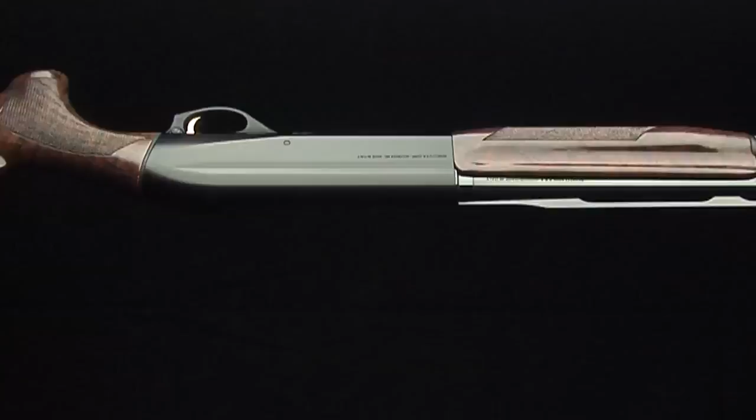Benelli Armi was established in Urbino, central Italy in 1967 and, since its inception, has revolutionized the concept of shotguns, becoming the world's top manufacturer of semi-automatics. Yet not many know that Benelli, as a firearms manufacturer, began as a side project when the company was known only for their production of motorcycles.

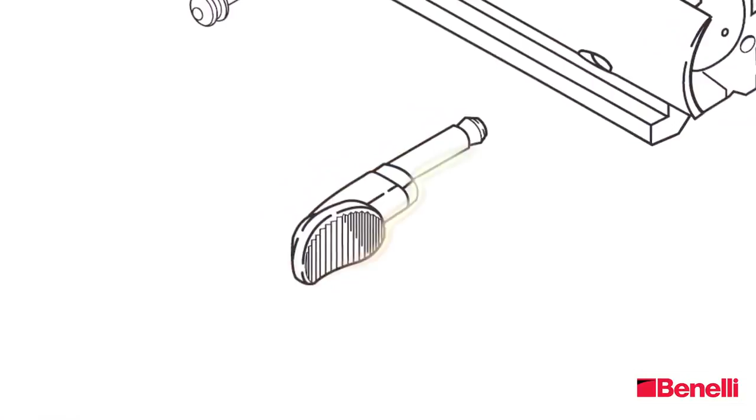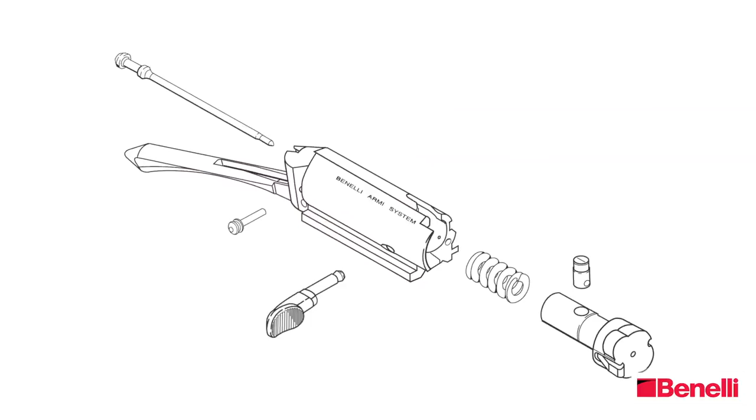The Benelli brothers, both keen hunters, were approached by a young inventor, Bruno Civolani, with a new and unique type of semi-automatic shotgun mechanism, the inertial system. The key features of this system were its reliability, safety, simplicity, high performance, minimum maintenance, and high firing rates, up to 5 rounds in less than 1 second. To the present day, the inertial system is still recognized as the most efficient of all semi-automatic shotgun mechanisms.

Today, Benelli is a highly technological company, where innovation is priority and every step is taken towards developing inimitable products. Year after year, Benelli's firearms have become milestones in the annals of sporting history and are considered the ultimate must-haves by most hunters. The SL80, 121, Montefeltro, Super Black Eagle, M4, Raffaello Creo, M2, Beccaccia, Comfort, Raffaella 28, Creo Comfort, Bimillionaire, the Argo E semi-automatic rifle, and now the Vinci, the head of a whole new family.

How does a Benelli firearm come to be? It all starts with the customer. Benelli's marketing department analyzes the latest trends, needs and wishes, and passes on a set of design requirements to the R&D department, where expert engineers develop the high-performance products that today's hunters demand. Every phase, from concept to distribution, is supervised with the utmost care and precision, with the greatest emphasis on design.

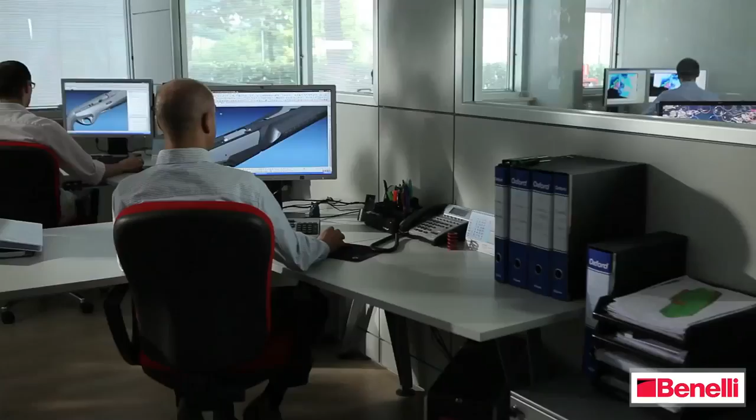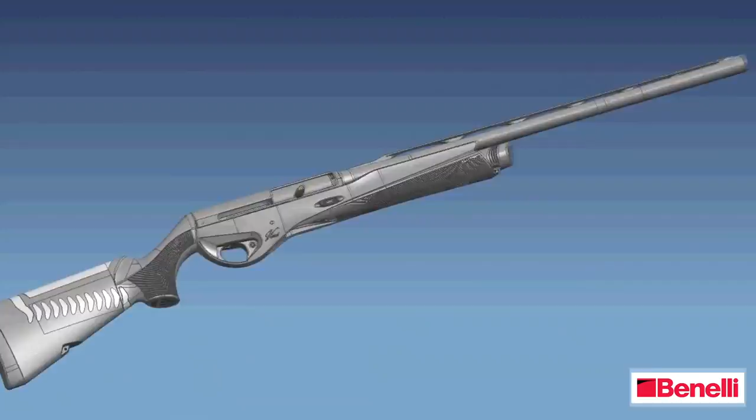Benelli's engineers use sophisticated CAD and CAE software to design their new shotguns and to simulate their functioning. Long gone are the days when gun makers had to test their new ideas by trial and error before achieving a satisfactory result. Today, every little detail, down to the smallest component, is verified and optimized virtually well before it appears in the real world.

At Benelli, all possibility of human error has been eliminated from the design process, because what happens on the computer screen is exactly what will happen in the real world. Simulation and reality match perfectly.

Over the years, Benelli's R&D department has developed 19 international patents, including the Comfortech system, unrivaled in reducing recoil and vibration, cryogenically treated barrels for improved ballistic performance, and the Vinci inertia system that achieves maximum stability and performance when firing. Special materials and sophisticated coating treatments make Benelli products exclusive and unrivaled.

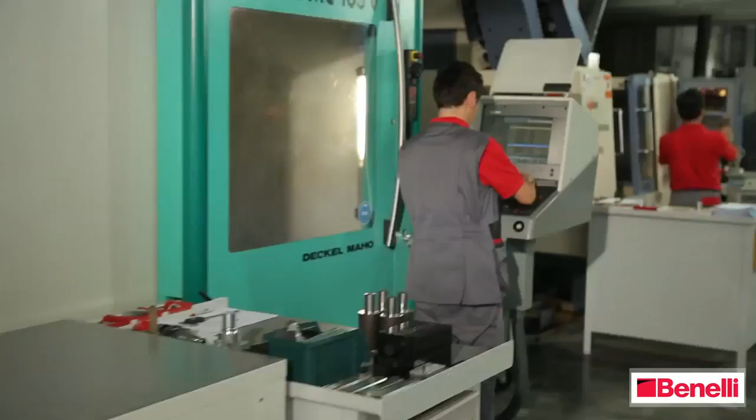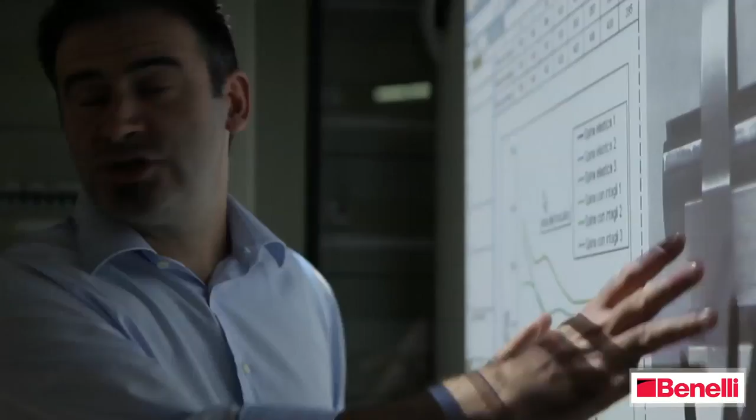The testing department is where new products take shape, where the virtual becomes real, where ideas are transformed into prototypes. Futuristic test equipment and specialist technical personnel assemble and test the products, destined to become Benelli's next best sellers.

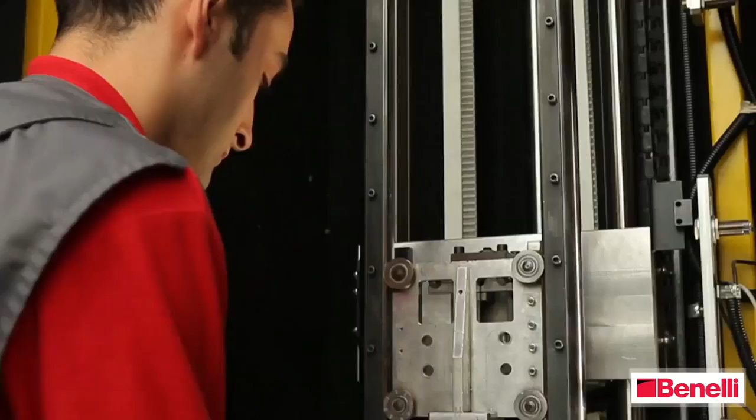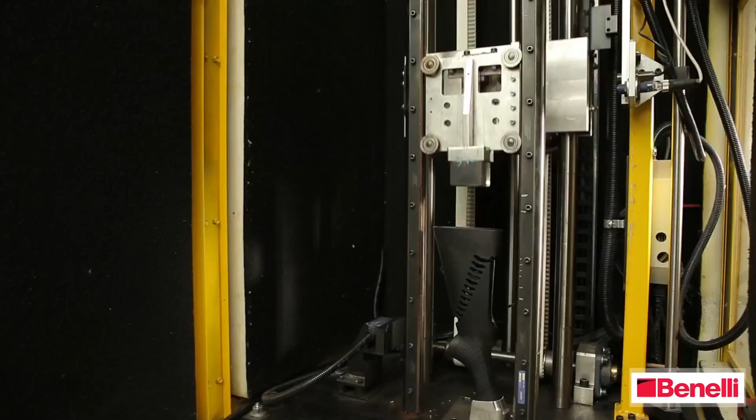Every single component is tested under the most extreme conditions, subjected to the toughest trials, and stressed relentlessly for hours on end, way beyond what any weapon would normally undergo in the real world. Benelli wants to be absolutely certain of the safety and reliability of its products.

All Benelli prototypes must prove themselves exceptionally safe and reliable, and must perform consistently. Data obtained from sensors and sophisticated slow-motion video cameras are analysed in detail to ensure that the weapon being tested not only behaves perfectly, but delivers the ultimate in performance as well.

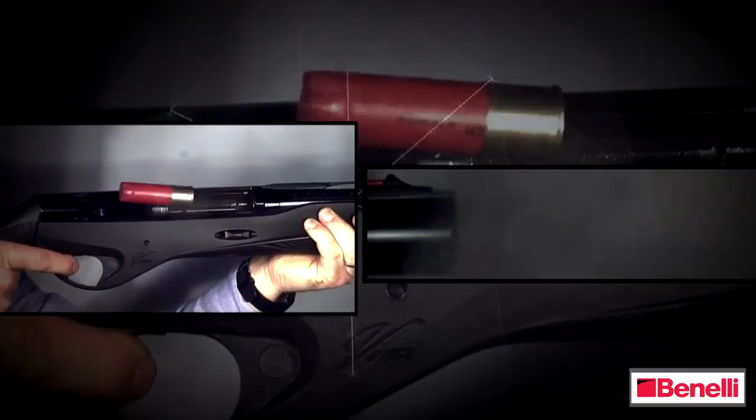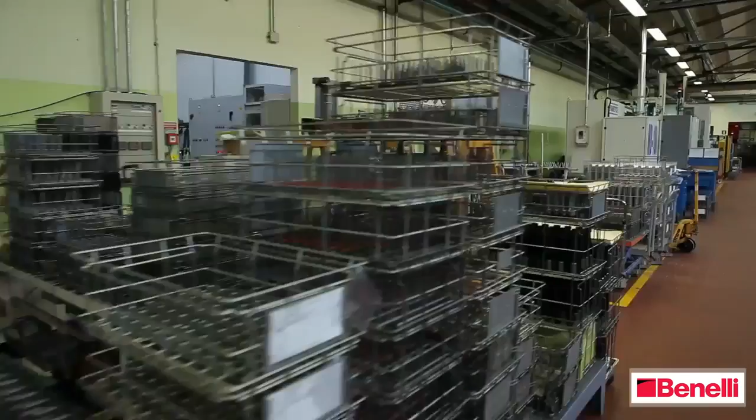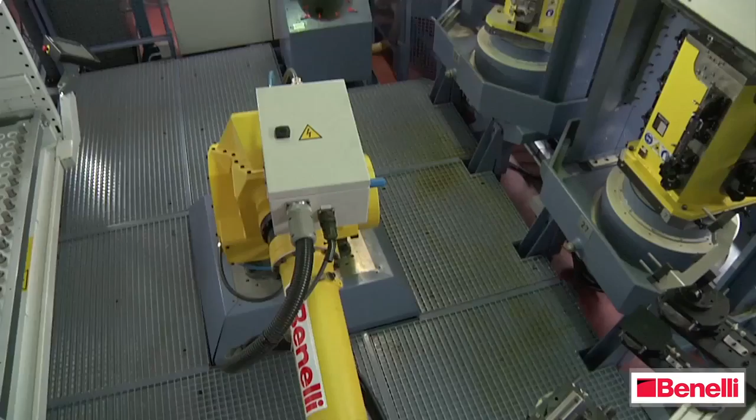Only when all tests have been passed is a shotgun declared fit for cloning. And cloning is just the right term, because Benelli's advanced automation produces exact duplicates of every individual component. This means that the end customer purchases an exact copy of the shotgun that has been tested in Benelli's testing department. Tireless and infallible robots repeat every operation with absolute precision, and the entire production line is continually monitored by a control system to ensure its perfect functioning.

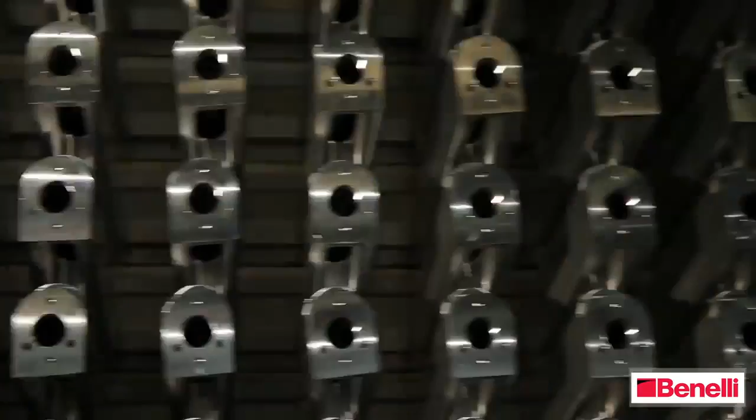Piece after piece, all perfect and identical, no exceptions. Every component must match flawlessly the original design.

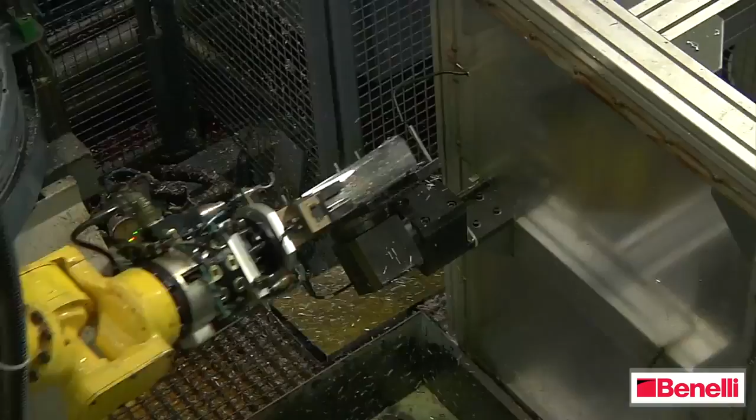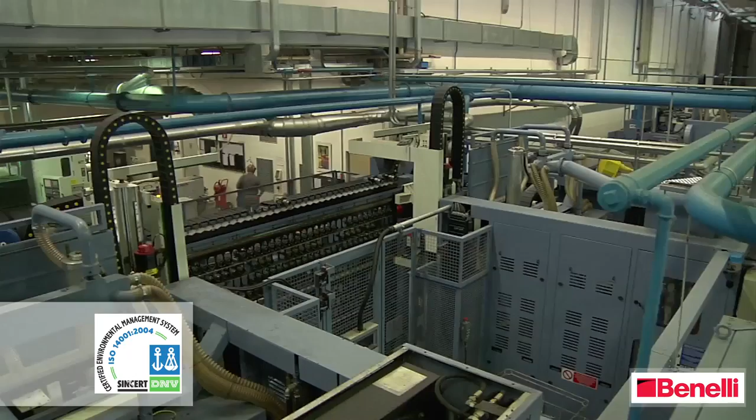The Benelli factory is unique in the world for its automation as well as the attention towards environmental, health and safety issues. Advanced ventilation, climate control and cleaning systems safeguard the workforce, while stringent anti-pollution measures, recycling processes and toxic waste disposal systems ensure maximum respect for the environment. The Benelli factory was the first and is still the only firearms factory in the world to have been awarded ISO 14001 certification.

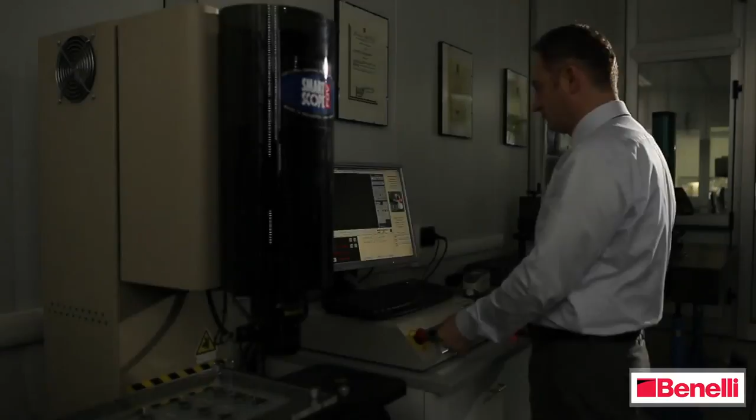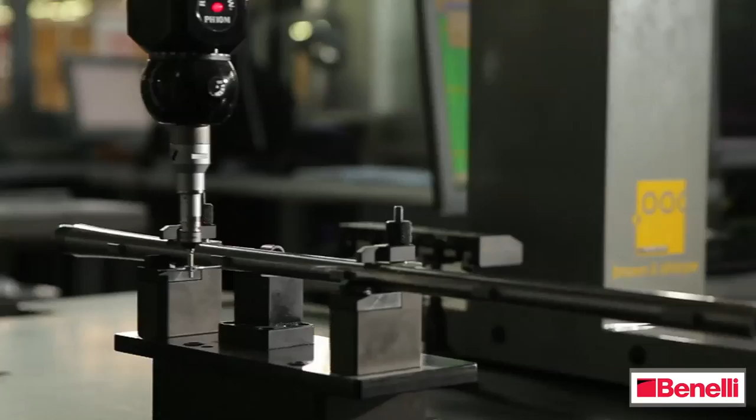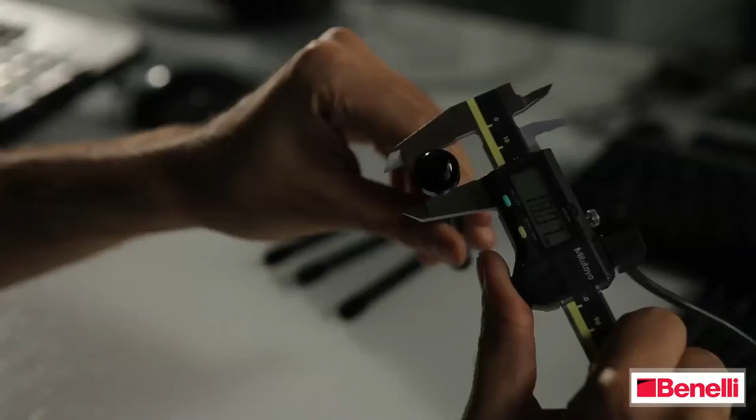So far, we've seen that prototypes are only released if they are perfect, and that robotic systems are used to make perfect copies. But even this is not enough for Benelli. Random samples from the production line are regularly tested in the quality assurance department. Specialist quality technicians check piece after piece to make sure that the Benelli production system is working perfectly. In addition to manual testing, special automatic equipment is used to measure tolerances of every part. Perfection is not something you can leave to chance, and Benelli's reputation must be protected at all costs.

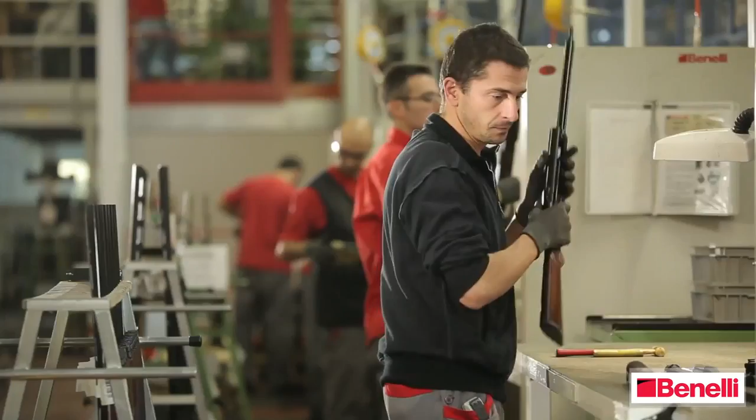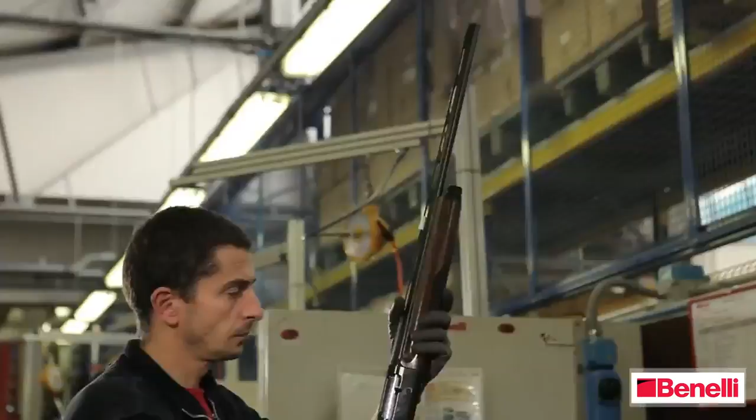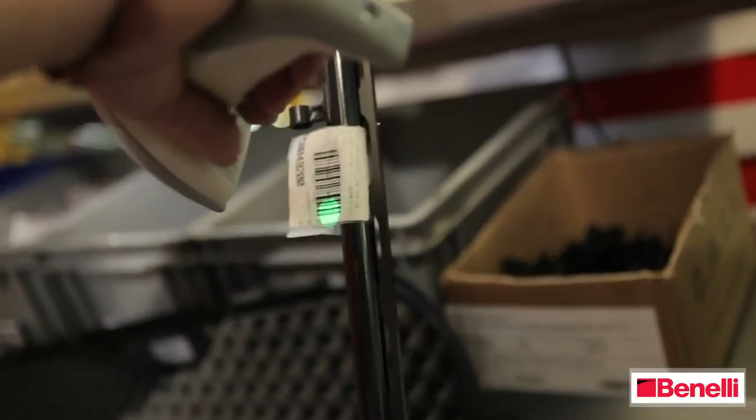Once all the components are ready, they are put together by specialists in the assembly department. Here too, operatives perform a series of checks during the assembly of the finished shotgun. At last, the shotgun is ready to go out to the customer and is prepared for shipping along with all its accessories. Even the highly manual packing process is validated by advanced software to prevent errors and omissions.

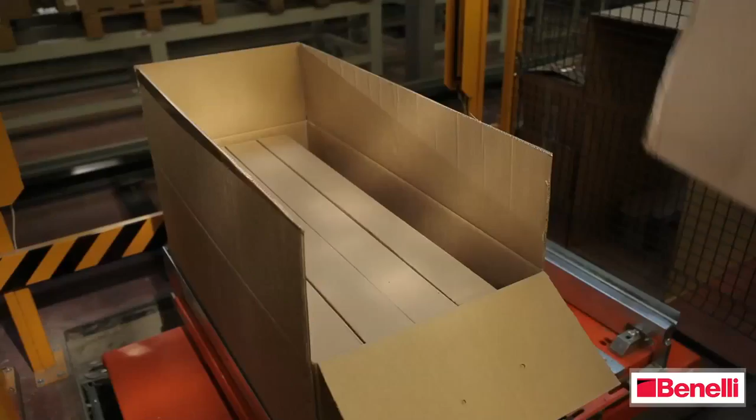The finished product warehouse and the shipping department are fully automated, yet further proof of Benelli's commitment to advanced technology. All picking and transfer activities are controlled by an automation system designed for maximum speed and precision.

Benelli also invests heavily in advertising, promotional materials for point of sale, and participation in leading hunting and firearm trade shows, where ready-for-market innovations are presented every year.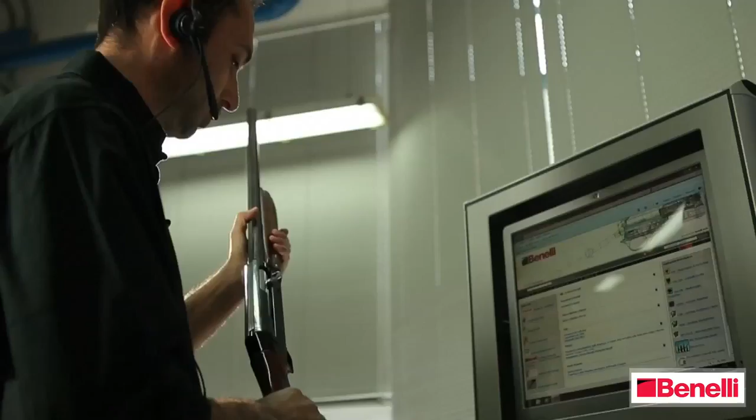But Benelli's attention to its products does not stop with the purchase, and the company ensures their customers are supported and assisted through dedicated customer service personnel. Customer support includes repairs, and it's not unusual for a technician to phone the owner of a serviced product to explain exactly what he has done, or to pass on hints on how to get the most performance from the firearm. Benelli customers can rest assured that customer service will always be at their disposal to solve whatever problems might occur.

Futuristic products, superb quality, advanced technology and attentive customer care are the foundations on which Benelli has grown over the years, and the reasons why Benelli leads the world in semi-automatic shotguns today.

Benelli products are sold and backed up by a reliable customer service in almost 80 countries and on 5 continents, from Europe to the Far East, and from Canada to New Zealand. All main markets are covered by an extensive sales and service network. Benelli has set up subsidiaries in partnership with Beretta to service the United States, its main market, as well as France, Spain, Germany and Russia.

Benelli is Italy and Europe's top shotgun manufacturer for the quality and value of sales, and number 1 in the United States for value of sales. More importantly, Benelli is the leading brand globally, with a share of over 20% of the world market. In the law enforcement and defense sectors, Benelli is the preferred supplier to many of the world's most prestigious special and armed forces.